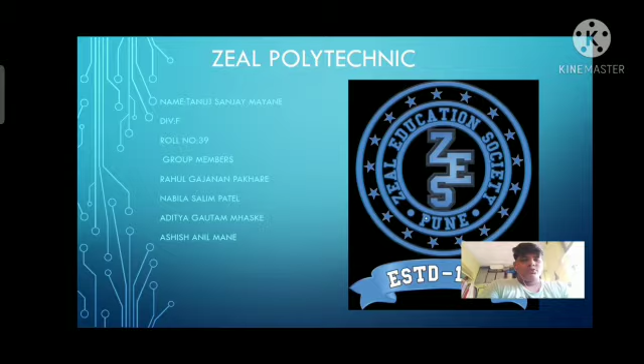Today I am presenting you my mini project. My mini project name is Explain Scales and Sludge Formation and its Effects. Let's get started. Sludge and scale formation in boiler.

In a boiler, water is continuously evaporated to form steam. This increases the concentration of dissolved salt. Finally, a stage is reached when the ionic product of this salt exceeds the solubility product, and hence they are thrown out as precipitates.

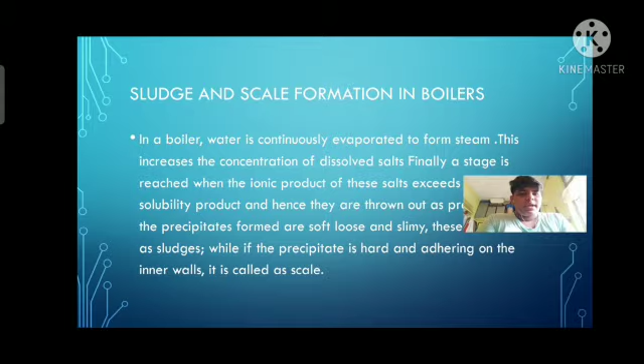Precipitates formed that are soft, loose, and slimy are known as sludge. While if the precipitate is hard and adhering on the inner wall, it is called scale.

Sludge. Sludge is a soft, loose, and slimy precipitate formed within the boiler. Sludge-forming substances have greater solubilities in hot than in cold water. Example: MgCO3, MgCl2,

MgSO4, etc. They are formed at comparatively colder portions of the boiler and get collected at places where the flow rate is slow. They can be easily removed, scraped off with a wire brush.

If sludges are formed along with scales, then the former gets entrapped in the latter and both get deposited as scales.

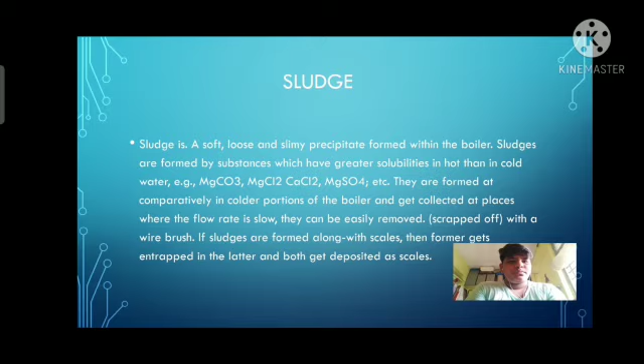Advantages of sludge. The system itself does not cost much to install, providing a good return on initial investment. The effluent water produced is of good quality as long as the sewage is of a uniform type and volume, and the activated sludge stays activated.

It does not require much room to install and operate the system within your facility, making it a good option for applications where space may be at a premium. There are very few odors or pests involved, which makes hygienic, safe, and convenient operation easy. The process is relatively efficient, and there should be very little loss of pressure within the system.

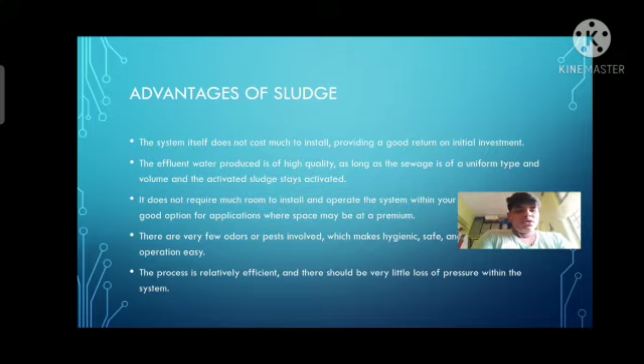Disadvantages of sludge formation. Sludges are poor conductors, so they tend to waste a portion of heat generated and thus decrease the efficiency of the boiler. Excessive sludge formation disturbs the working of the boiler. It settles in regions of poor water circulation, such as pipe connections, plug openings, gauge glass connections, thereby causing even choking of the pipes.

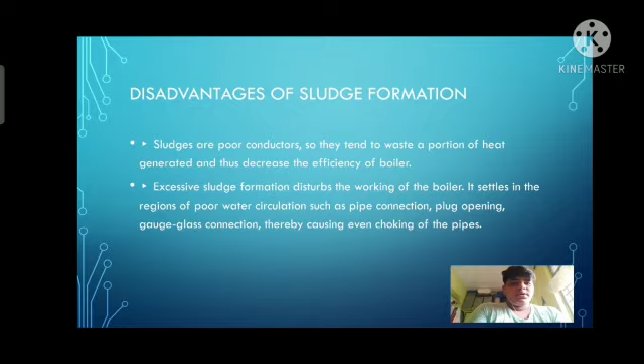Prevention of sludge formation. By using soft water, and by frequent blow down operation, that is, partial removal of concentrated water through a tap at the bottom of the boiler when the extent of hardness in the boiler becomes alarmingly high.

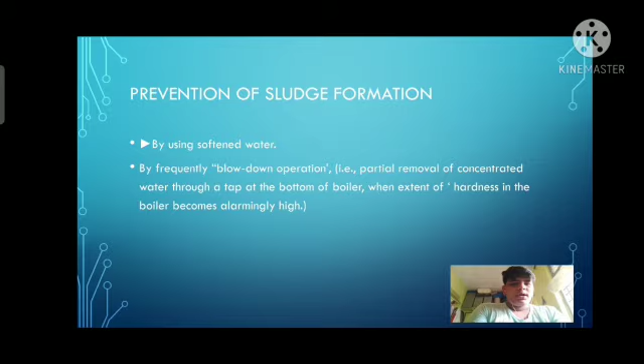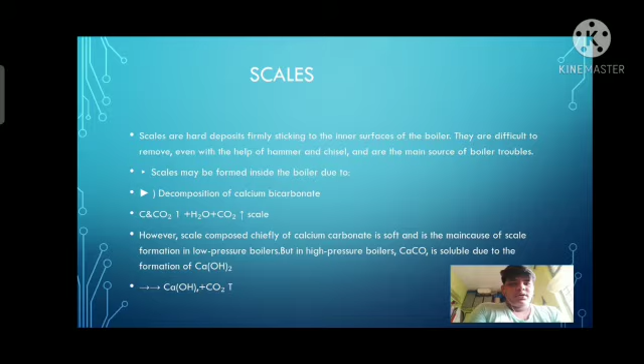Scales. Scales are deposits firmly sticking to the inner surface of the boiler. They are difficult to remove even with the help of hammer and chisel, and are the main source of boiler troubles. First, scales may be formed inside the boiler due to decomposition of calcium bicarbonate: Ca(HCO3)2 gives CaCO3 plus H2O plus CO2.

However, scale composed chiefly of calcium carbonate is soft and is the main cause of scale formation in low pressure boilers, but in high pressure boilers CaCO3 is soluble due to the formation of Ca(OH)2: CaCO3 plus H2O gives Ca(OH)2 plus CO2.

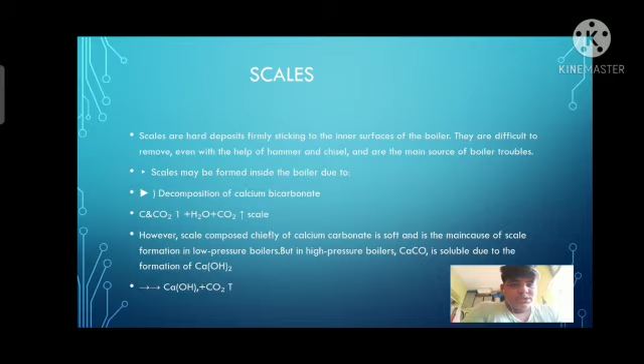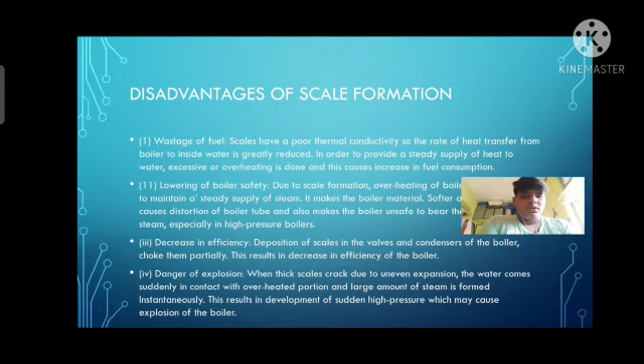Removal of scales. Scales are removed by mechanical methods or by chemical methods. First, if the scales are loosely adhering, they can be removed with the help of a scraper, piece of wood, or wire brush. Second, if the scales are brittle, they can be removed by giving thermal shock, for example, heating the boiler and then suddenly cooling with cold water.

Third, if the scales are loosely adhering, they can also be removed by frequent blow down operation. Blow down operation is the partial removal of hard water through a tap at the bottom of the boiler when the extent of hardness in the boiler becomes alarmingly high. Makeup water is the addition of fresh softened water to the boiler after blow down operation.

Fourth, if the scales are adhering and hard, they can be removed by dissolving them by adding chemicals. For example, CaCO3 scales can be dissolved by using 5 to 10% HCl. Calcium sulfate scales can be removed by adding EDTA, since the Ca-EDTA complex is highly soluble in water.